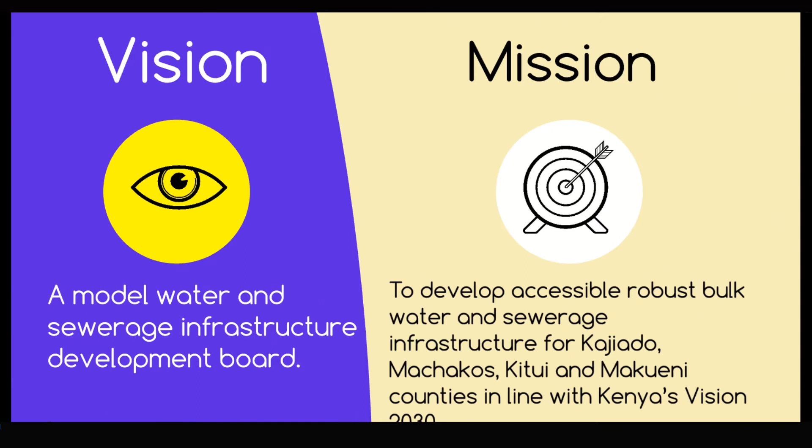Our vision is a model water and sewerage infrastructure development board. Our mission is to develop accessible, robust bulk water and sewerage infrastructure in the 4 counties in line with the Kenyan Vision 2030.

Our strategic objectives are clear and our core values include excellence, integrity, teamwork, responsiveness, creativity, and innovation.

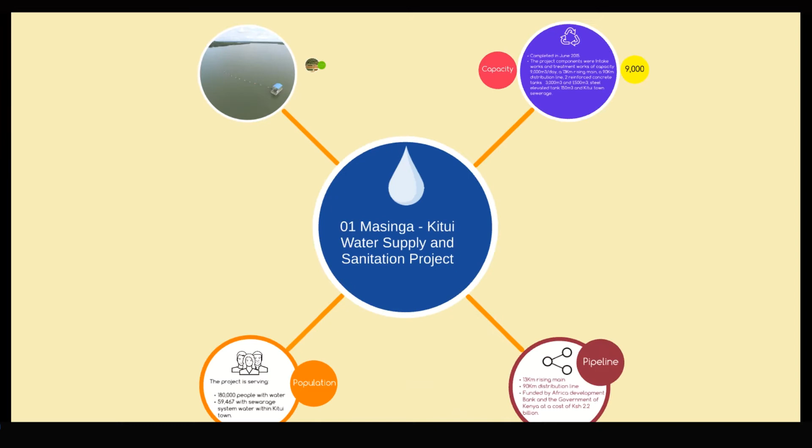Our complete projects include the Masinga Kitui Water Supply and Sanitation Project with a floating intake and wastewater stabilization ponds in Kitui town.

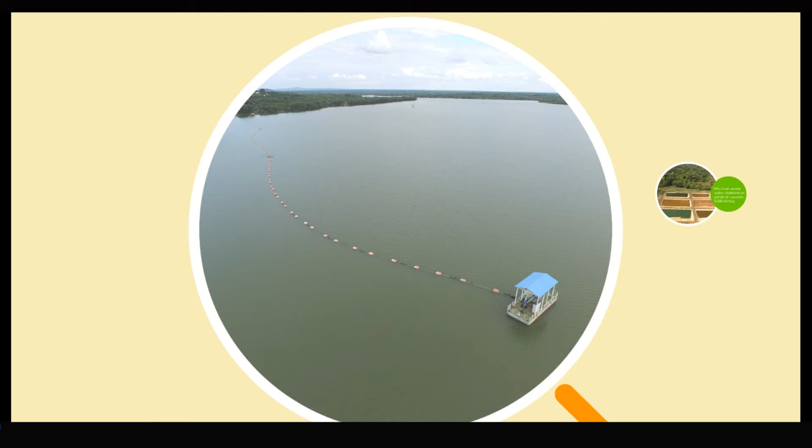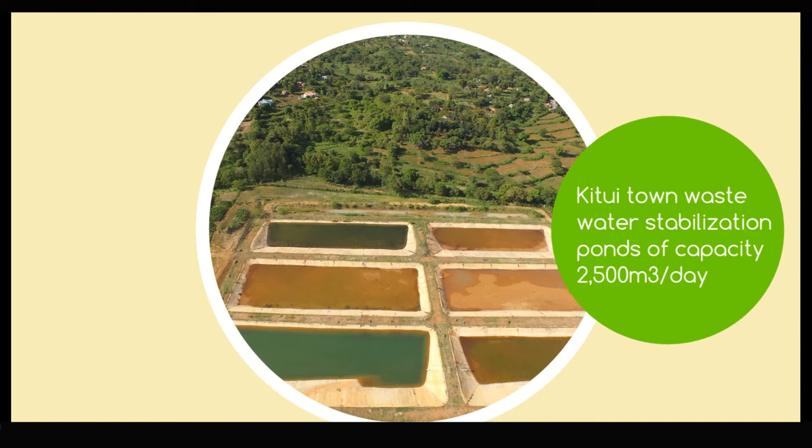The project, which has a capacity of 9,000 cubic meters a day, was completed in June 2015. The 90-kilometer distribution line has a 13-kilometer rising main serving 180,000 persons with water and over 59,000 persons with sewerage water within Kitui town.

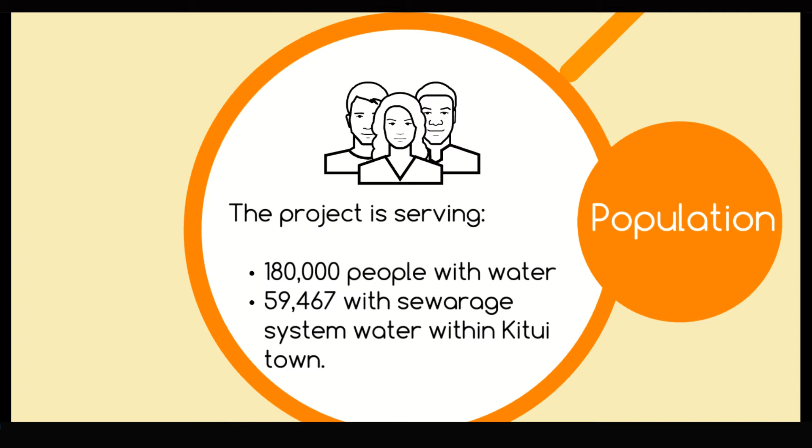The rehabilitation of Yatta Canal water project is our second milestone, funded by the African Development Bank and the Government of Kenya.

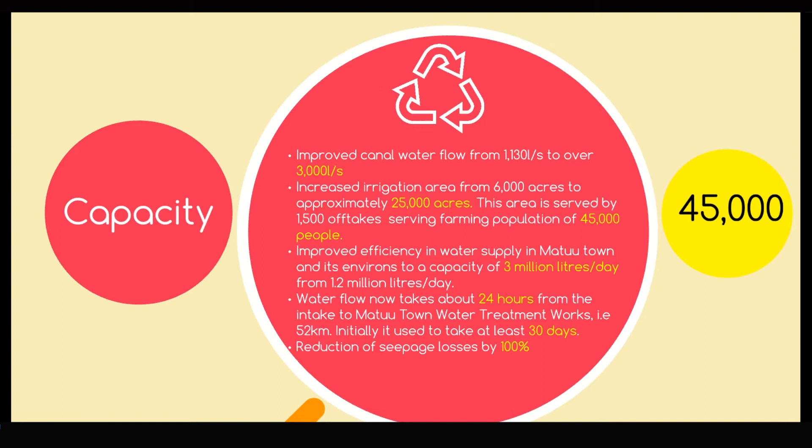Its impact is enormous in the area of irrigation water and livestock water, boosting agriculture. The project currently serves 45,000 farmers and 75,000 residents accessing clean water.

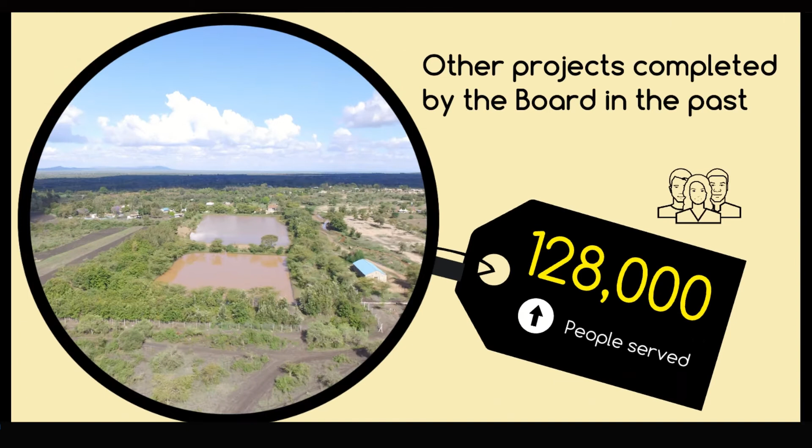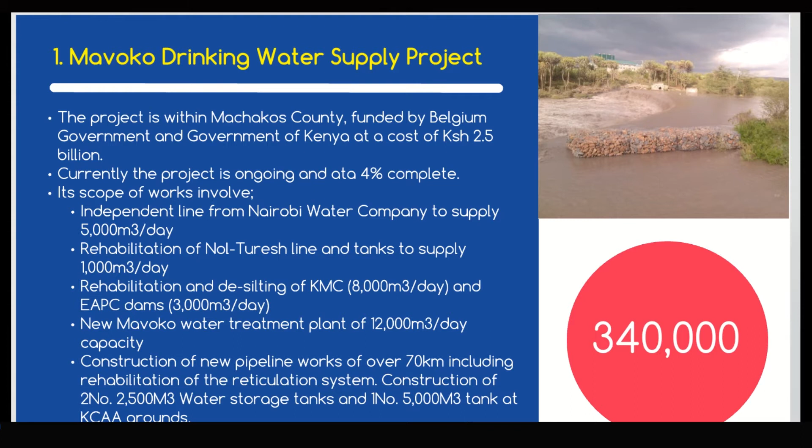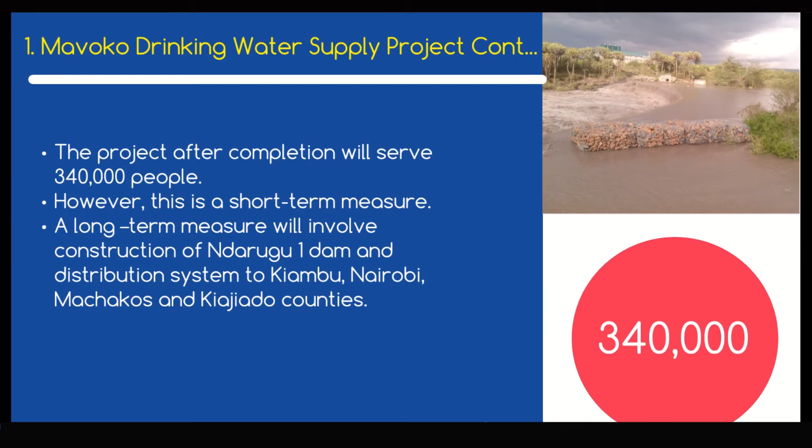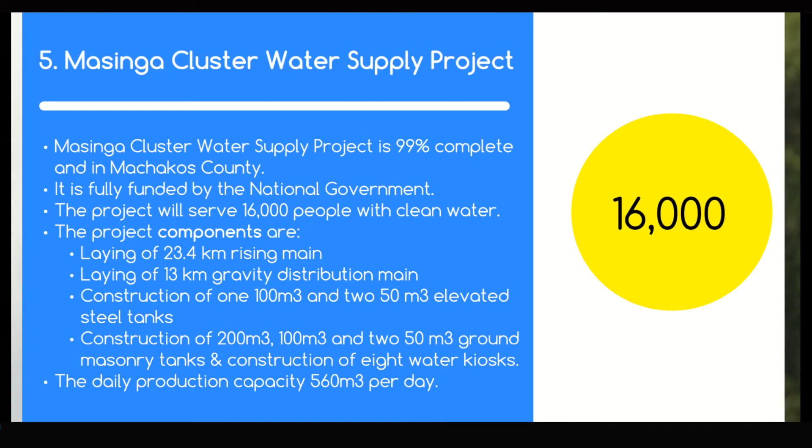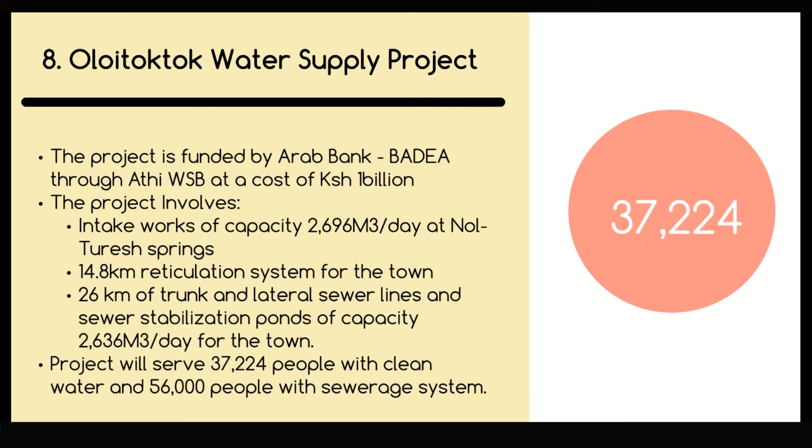Ongoing water and wastewater projects include Mavoko Drinking Water Supply Project systems, Migwani Water Supply Project, Matungulu Water Supply Project, Masinga Cluster Water Project, Machakos Water Supply and Sanitation Project, Mala Cluster Water Supply and Sanitation, Oloitoktok Water Supply, Ndarugu Dam Water Supply Project, and finally drilling and equipping boreholes.

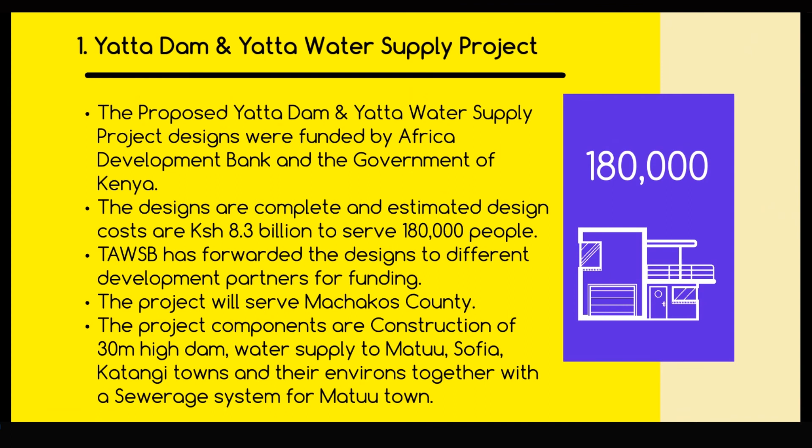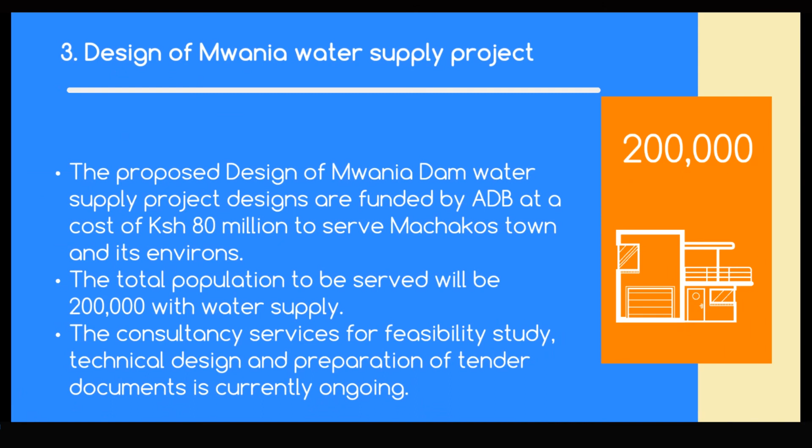Ongoing designs include Yatta Dam and Yatta Water Supply Project, Oloitoktok Water Supply and Sanitation Project, design of Mwania Water Supply Project, and Ongata Rongai, Ngong and Mavoko Water Sewerage Project.

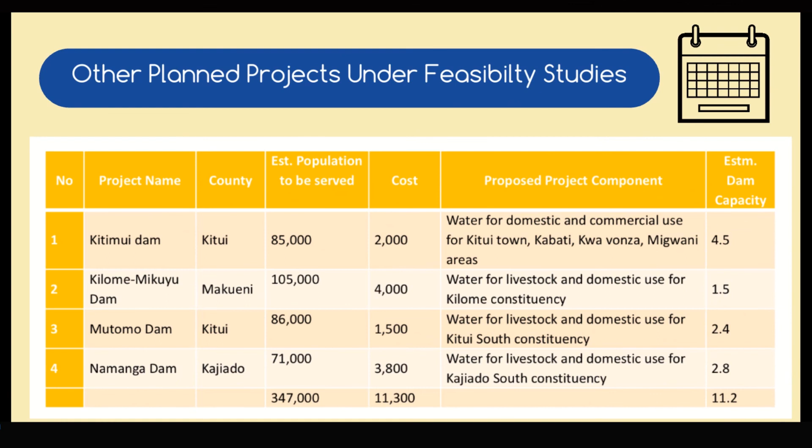A number of projects are under feasibility studies. We have delivered, we are delivering, and we shall deliver.